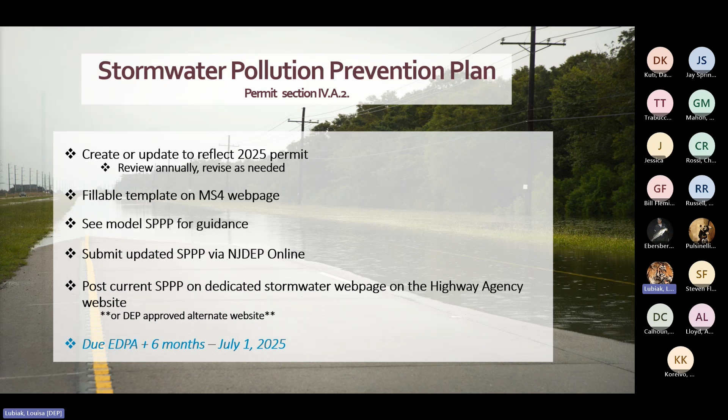This is something all permittees have been required to do from the beginning of the MS4 program. It's simple: to comply with state and local laws regarding public notice, there are certain permit-related actions that must be announced in a way that lets your community know when important stormwater decisions are being made.

Public notices are typically done by posted newspapers, social media, and permittee websites. You may also choose to send a direct email to distribute information.

Currently, this requirement is to make sure that key stormwater materials were posted somewhere on your website. The modification in the new permit will be that these materials now need to be posted on a dedicated stormwater webpage where the public can find all stormwater materials in one place.

If your facility does not have its own website, contact your MS4 case manager to determine an alternate website to post your materials. We have prepared an easy-to-fill template for your webpage administrator to use, and we have staff in-house to provide one-on-one assistance for anyone that needs help.

You will need to post your updated stormwater pollution prevention plan, regulatory mechanisms, stormwater infrastructure map, and information related to the watershed improvement plan, such as meeting dates and reports. We will talk about this topic more as we go on today.

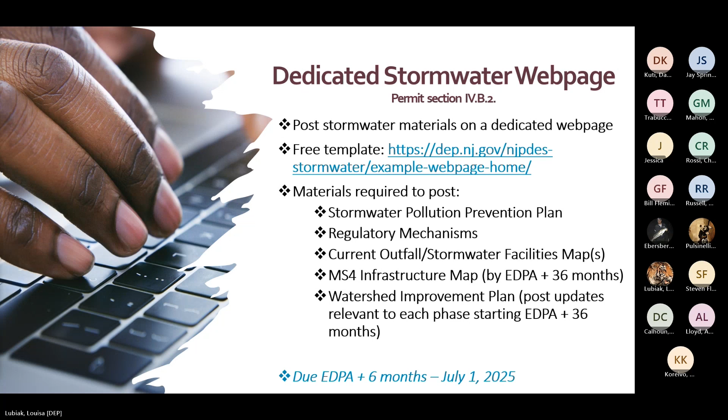This permit condition has been modified from the 2020 permit. Previously, only permittees who operate rest or service areas were required to implement a local public education and outreach program and earn a total of at least 5 points each year. The proposed change to this condition will now require all permittees to accumulate a minimum of 7 points each year by completing at least 3 different activities.

Additionally, one activity must educate businesses and the general public on the hazards of illicit connections and improper disposal of waste. The point system for education and outreach is found in Permit Attachment A and lists various activities, some carried over from the previous permit and some new, with a brief description and their associated point values.

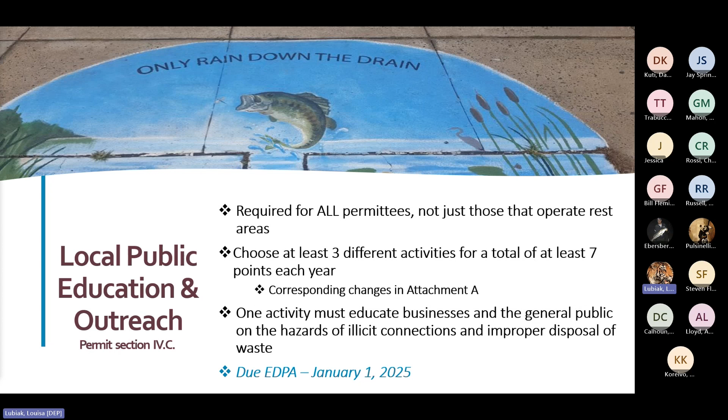You will need to keep records of your activities and report them into your annual report like always. If you need ideas or materials, we have some outreach materials on the MS4 webpage for guidance.

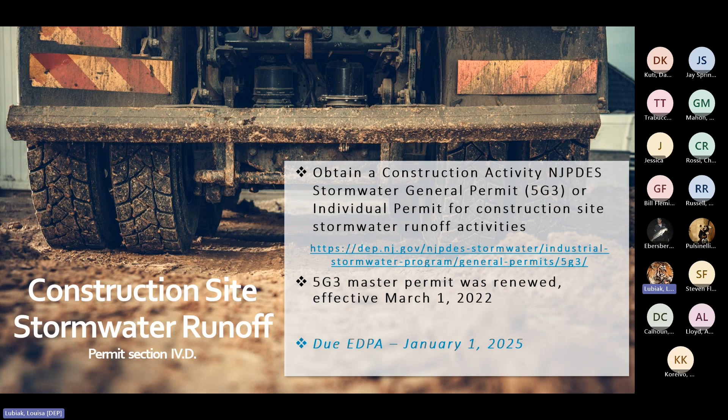This condition is a carryover from previous permit iterations. It's the requirement to get a 5G3 or an individual industrial stormwater permit before starting construction activities that disturb more than 1 acre of land, or are part of a common plan of development that disturbs more than 1 acre of land. The 5G3 Master General Permit was renewed in 2022 with some minor changes, and it's available through the link on the slide.

Here are some highlights of the changes to Attachment A, the point system for public education and outreach activities. First, we removed the option to get points for having a stormwater website, as this is now a permit requirement. All other previous activities had been carried over and modified for clarity.

We also added a series of new activities for points, such as promotional item giveaway, designated pet relief areas, regulatory mechanism signage, regulatory mechanism education, storm drain labeling campaign, a litter cleanup campaign, road access road salt pile program, and a road salt education campaign. You can find a description of each activity as well as their associated point values in Attachment A in the pre-draft document.

This condition is another one that permittees have been required to follow, as it highlights the requirements related to stormwater management designs for major development projects. Engineers who review and approve major development projects must ensure the project design complies with the stormwater management rules at NJAC 7:8 and the department's BMP manual, and then constructed according to the approved plans.

The engineers who review and approve these projects should be different from the engineers who design the projects. If the stormwater program coordinator for the highway agency is not the engineer, the SPC needs to be familiar with the condition and make sure the engineer is following the requirements.

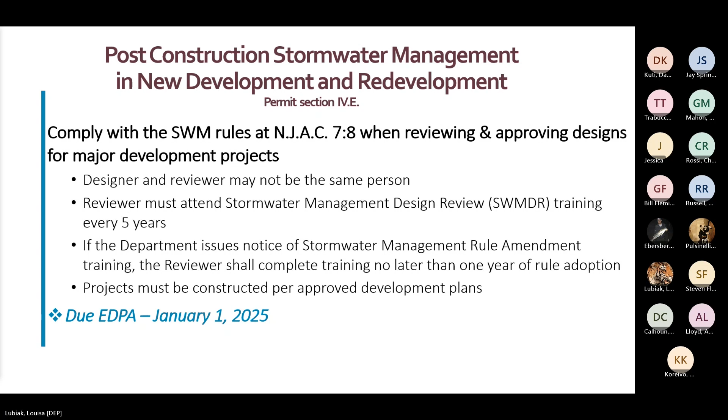In this permit, we included proposed stormwater management rule amendments from the New Jersey Protecting Against Climate Threats, or NJPACT, initiative. These rule amendments are to be adopted and become effective by fall 2025, after the highway agency permit goes into effect. Thus, the changes are being proactively added to the permit.

Requirements added to the proposed NJPACT amendments to the stormwater management rules include the addition of requirements from 7:8-1.6D, which specify which iteration of the stormwater management rules are applicable to a major development for any public roadway project that has determined a preferred alternative or reached an equivalent milestone.

Updating this permit's requirements to match 7:8-5.10, which allows the department to grant a variance from the design and performance standards of 7:8-5.3 through 5.6, assuming the conditions at 7:8-5.10 are met, and to demonstrate compliance with the groundwater recharge, stormwater runoff quantity, and stormwater runoff quality requirements of the rule.

Submit a certification stating that an analysis was conducted in conformance with NJAC 7:8-5.3J.

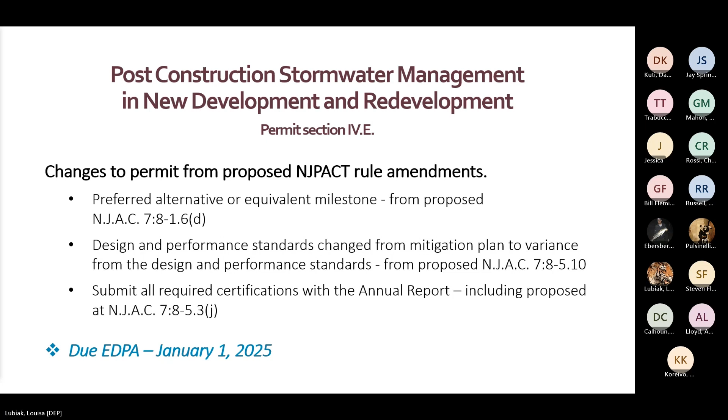The purpose of having regulatory mechanisms in place is to keep pollutants out of the stormwater and prevent them from making their way into streams, lakes, and other water bodies, where they can contribute to harmful algae blooms, or HABs, cause beach closings, and add to other negative impacts. Regulatory mechanisms help keep the community clean by setting a standard for the public and ensure you have a way to penalize those who violate those standards.

Let's go through each one briefly. One is pet waste. The intent is to get people to clean up after their pets, so their waste stays out of the stormwater system and ultimately out of the watershed. The highway agencies can also use this ordinance to completely prohibit pets from being allowed on highway agency property.

Two is wildlife feeding. The intent is to stop people from feeding wildlife like ducks and geese, for example, to discourage them from gathering where they can leave droppings on public property that also pollute the watershed.

Three is litter control. The intent is to keep trash, including solids, floatables, and residual pollutants, from contaminating stormwater and causing flooding due to debris clogging the MS4. You can either enforce your own regulatory mechanism here or enforce the state litter statute to meet this requirement.

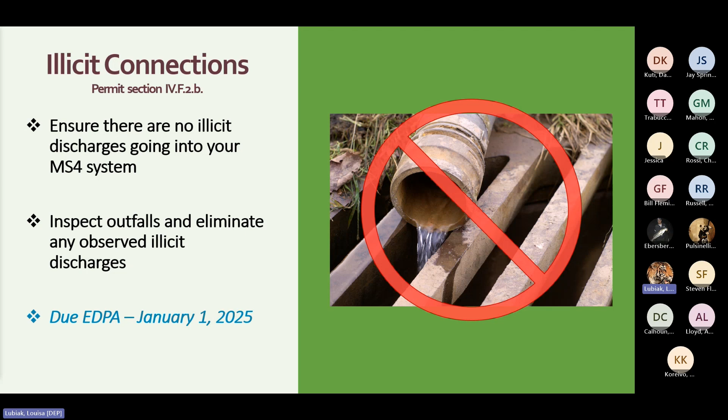This condition was carried over from a previous permit iteration. You must develop a litter pickup program that includes roadside cleanup of trash and debris and regular collection of refuse from litter and recycling receptacles, including those located at rest areas, and maintain records of roadside cleanups and estimates of the total amount of trash and debris collected.

There is no change to this condition from previous permit iterations. The permit requires quarterly street sweeping, where the permittee shall sweep at a minimum of once every 3 months, or more frequently as necessary to eliminate recurring problems, for all segments of limited access highways, including ramps and parking areas that are owned or operated by the permittee and have storm drain inlets or discharge directly to surface water.

Triannual street sweeping: the permittee shall sweep at a minimum of once every 4 months, or more frequently as necessary to eliminate recurring problems, for all segments of streets, ramps, and parking areas that are owned or operated by the permittee and have storm drain inlets or discharge directly to surface water, but are not limited access highways.

An annual street sweeping, where the permittee shall sweep at a minimum of once per year, or more frequently as necessary to eliminate recurring problems, for all segments of streets, ramps, and parking areas that are owned or operated by the permittee, but do not have storm drain inlets or discharge directly to surface water.

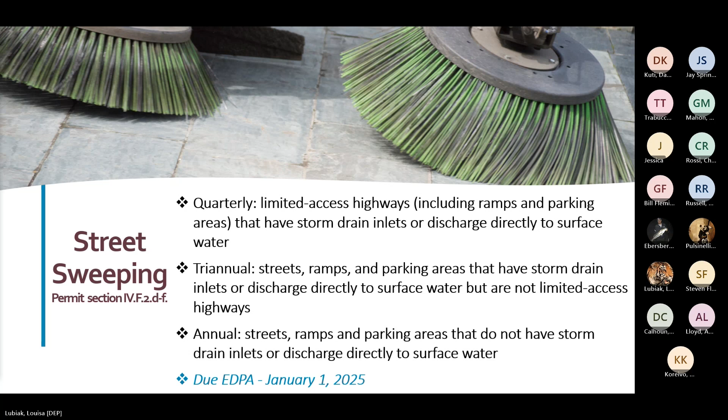Storm drain inlet labeling is another requirement carried over from previous iterations of the permit. Each inlet needs appropriate labeling to indicate that it drains to a water body. If the inlet doesn't have permanent wording cast into the structure, like the photo on the bottom shows, please attach

a button like the one above to the inlet, or use a stencil to paint a similar message. Something new in the 2025 permit is that all storm drain inlets on your property must be retrofitted by the end of this permit cycle, December 1, 2029. You do not need to replace every inlet. It is perfectly acceptable to use a bolt-on plate across the curb opening of the structure to bring old-style structures into compliance, like you see in the top right picture.

Keep in mind that if you are installing a new storm drain, you must use an inlet structure that complies with the NJDOT design standard and grate spacing in Attachment B from the permit. Another new condition is for all new storm drain installations to include a catch basin or other BMP designed for solid collection directly below the inlet or downstream of the new storm drain inlet prior to discharge to surface water. Storm drains installed on bridges and culverts are exempt from this requirement.

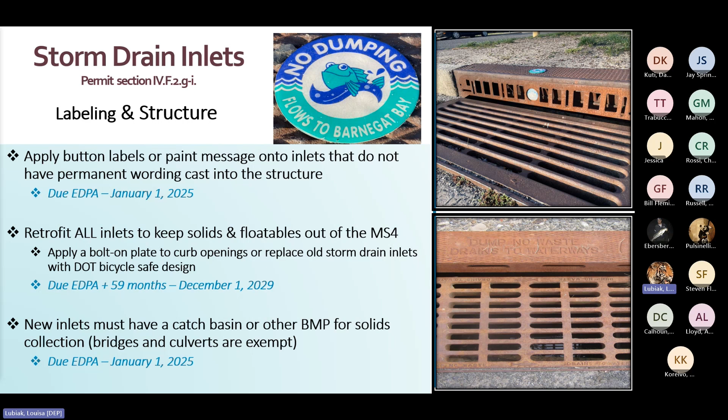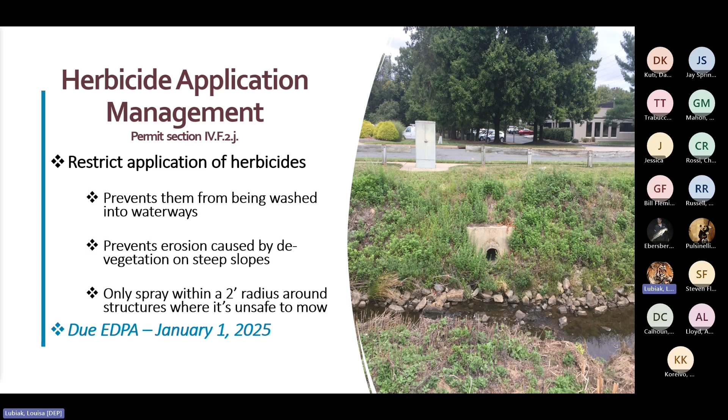This permit condition was carried over from previous permit iterations. The Stormwater Program Coordinator must ensure that staff properly apply herbicides. This means not applying herbicides on or adjacent to storm drain inlets or on steep slopes. Herbicides must only be applied in areas where it's unsafe to mow near a structure, and only sprayed within a 2-foot radius around the structure. Also, only apply herbicides along curb lines, highway medians, and unobstructed shoulders that contain unwanted vegetation, to keep herbicides from being washed into waterways and to minimize erosion and destabilization of steep banks.

This permit condition was carried over from the previous permit iterations with a slight name change. Road salt contributes to increased salinity in freshwater bodies, causing degradation of the habitat necessary to support aquatic life, such as trout. This requirement is aimed at cleaning up leftover salt piles that are sometimes deposited when the driver starts up or stops the spreader. Salt piles must be cleaned up within 72 hours of the storm, as conditions allow.

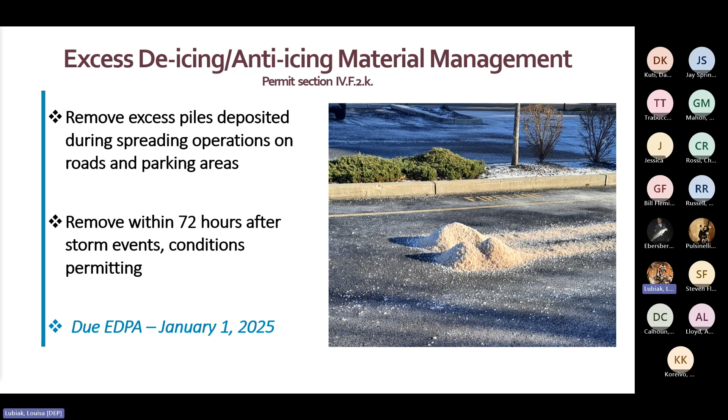This condition was also carried over from previous permit iterations with a slight name change. Grass, leaves, and tree trimmings that find their way into the MS4 have a potential to clog the conveyance and increase nutrients and total suspended solids, or TSS levels, in the receiving waters, which may result in harmful algae blooms. This requirement is intended to ensure appropriate management of materials generated by your staff when mowing, trimming trees, and wood chipping on highway agency properties. Permittees must ensure that nobody is intentionally blowing grass or leaves into the street, down the storm drain, or into ditches.

This is a new condition aimed at controlling the unnecessary removal of trees on highway agency properties, to prevent erosion and to promote stormwater infiltration. These requirements were made consistent with the No Net Loss Compensatory Reforestation Act.

First, let's talk about the exemptions, since there are so many. If a tree is a hazard, you may remove it. It is fine to remove hazard trees without replacing them. These include any trees that are diseased, infested by insects, dead, or dying. Also, go ahead and remove trees that obstruct traffic signs, pedestrian walkways, or safe passage of vehicles. If you have a concern about the condition of a tree, or an arborist declares that it is a threat, those are fine to remove.

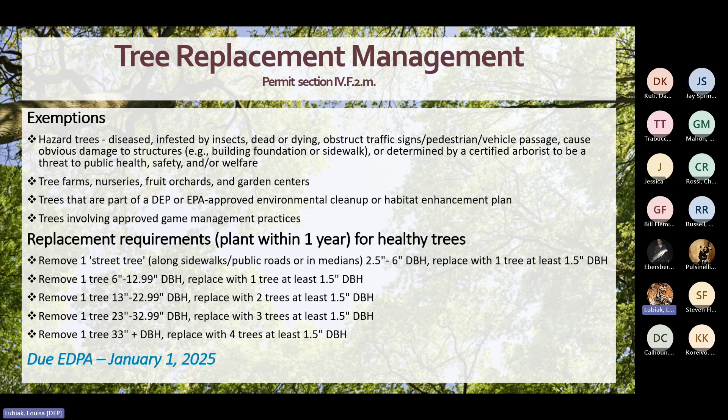The only time this permit condition comes into play is when you're removing perfectly healthy trees from highway agency property. These details are in the permit. Depending on the size of the healthy trees that are removed, you will replace it with one or more trees. It's a little stricter for street trees, which are those trees planted along the sidewalk, in a median, or along a public roadway. Removed trees are required to be replaced within 1 year of removal.

This is a new permit condition. Roadside erosion can cause sedimentation of receiving waters and stormwater infrastructure and can pose a public safety concern. We have received complaints about ongoing roadside erosion in several areas. In fact, the picture on the slide is not a stock photo, it is from one of our enforcement officers who is investigating an erosion complaint. This is a good example of why we have this condition in the permit.

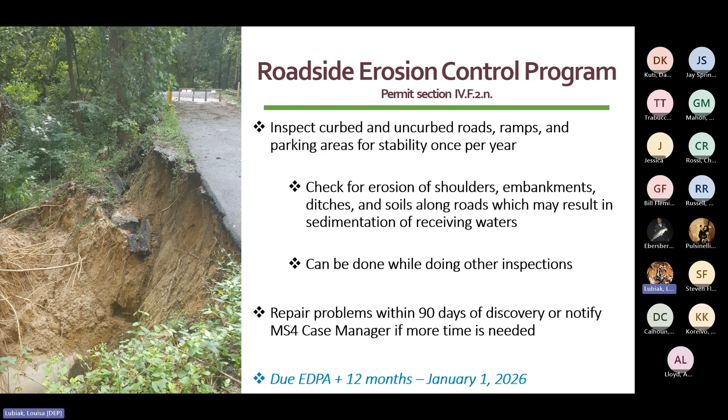Erosion checks can be done while performing other stormwater inspections. If problems are identified, the department allows 3 months to address it, unless another time frame is authorized.

This permit condition was carried over from previous permit iterations. The permittee must ensure that refuse containers and dumpsters that are outdoors or exposed to stormwater are managed as follows: they must always be covered with a tarp, lid, or permanent structure to prevent contact of waste materials with stormwater, unless actively being filled or emptied.

They must be leak-proof to prevent the discharge of leachate from the contents of the container. Temporary demolition containers, for example rubble, construction waste, and wood waste, or containers that hold large bulky items such as furniture, do not need to be leak-proof as long as they do not contain putrescible waste. Litter receptacles and refuse containers at industrial facilities authorized to discharge stormwater under a valid NJPDES permit do not fall under this permit condition.

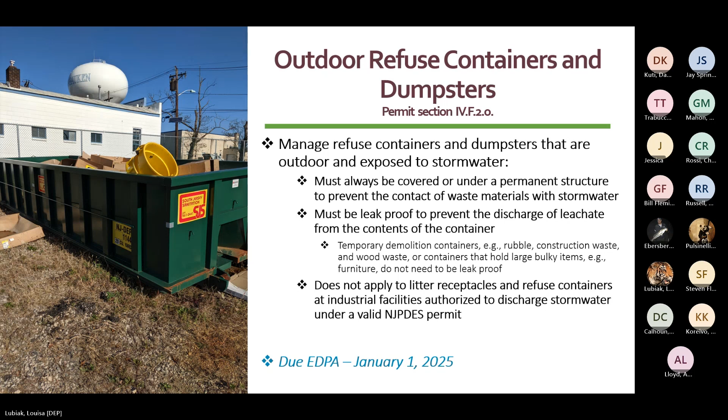This condition has been modified for clarity from the last permit iteration. Each of your outfalls must be inspected at least once every 5 years, with a minimum of 20% of the total number of outfalls inspected each year. Inspect newly identified outfalls within 30 days of discovery.

For condition, visually inspect outfalls for overall condition, structural integrity, proper function, damaged or missing components, and accumulation of trash and debris. Document when cleaning, maintenance, and repairs are necessary. Remove trash and debris within 30 days of discovery. All reports of compromised structural integrity must be investigated within 30 days, and repairs completed within 12 months of discovery.

Unless a longer schedule is approved by the department. Submit the outfall inspection form with the annual report. For stream scouring, visually inspect for erosion around the outfall and undermining of the outfall. Document when repairs and stabilization are needed.

All reports of stream scouring must be investigated within 30 days, and confirmed cases need to be remediated within 12 months of discovery unless a longer schedule is approved by the department. Submit the stream scouring investigation form with the annual report.

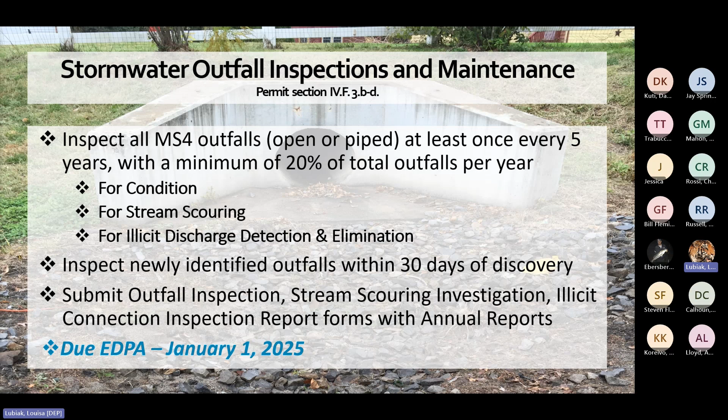This condition has been modified for clarity from the last permit iteration. Storm drain inlets: the storm drain inlet is the top grate and vertical curbside opening that are visible on the surface.

Inspect all storm drain inlets once per year. Storm drain inlet inspections can be done with a simple drive-by visual check, with cleaning and removal of sediment, trash, and other debris from the surface where needed.

Catch basins: the catch basin is the sump chamber below the surface, typically under the storm drain inlet. The inspection frequency for catch basins varies depending on how many you have. If there are less than 2,500 catch basins, they must all be inspected once per year.

If there are more than 2,500 catch basins, inspect a minimum of 20% of the total, or 2,500 per year, whichever is greater, on a rotation so that all catch basins are inspected at least once every 5 years at approximately the same frequency. Catch basin inspections must be done by looking inside the grate and hood of the inlet to see if cleaning is needed and to determine what equipment and staff will be needed to remove any sediment, trash, and other debris from the catch basin.

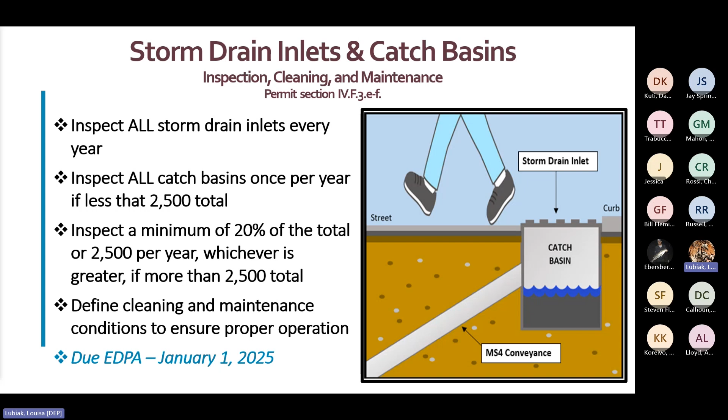MS4 conveyance inspection and cleaning. This is a newly defined condition aimed at conveyance systems such as pipes, man-made ditches, swales, etc. These must be inspected regularly and cleaned and maintained as needed to ensure proper function. Permittees must establish what conditions warrant cleaning and maintenance, as well as create an inspection schedule tailored to your system and resources. Though we didn't specifically list conveyance features, it has always been required to maintain all the stormwater facilities you own or operate, so you may already have a log of your conveyance systems.

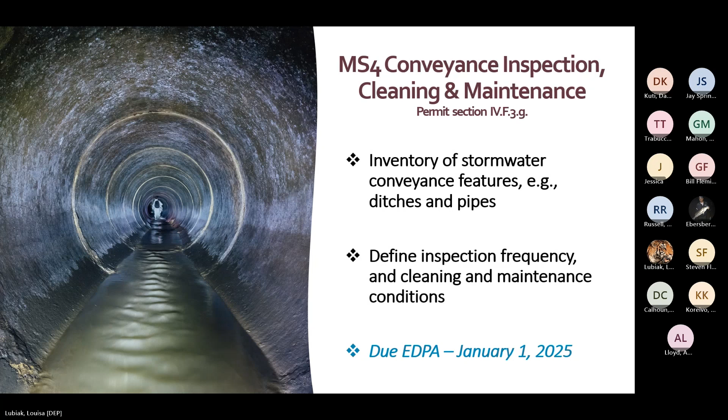This is a new condition that serves as a sort of catch-all since it refers to whatever stormwater facilities you have that are not covered in any other permit condition. The permit includes specific requirements for storm drain inlets, catch basins, outfalls, and conveyance systems, which make up most of the stormwater infrastructure. This requirement is to cover any components that are not listed, such as stormwater management basins and manufactured treatment devices. Your program and SP3 must define the conditions that warrant cleaning and maintenance to ensure proper function.

Follow the approved maintenance plans, or if plans don't exist, you can create one by following the department's Best Management Practice Manual or other maintenance guidance. If there is no approved plan or the feature in question is not listed in the department guidance, conduct inspections at least 4 times each year and after each rainstorm exceeding 1 inch of total rainfall.

If stormwater facilities are found to not be functioning properly, maintenance and repairs need to be completed as soon as possible, but no later than 90 days from discovery. Please refer to the department's BMP manual for guidance on this maintenance. If you need help, contact your MS4 case manager, who can put you in touch with our stormwater engineering group for assistance.

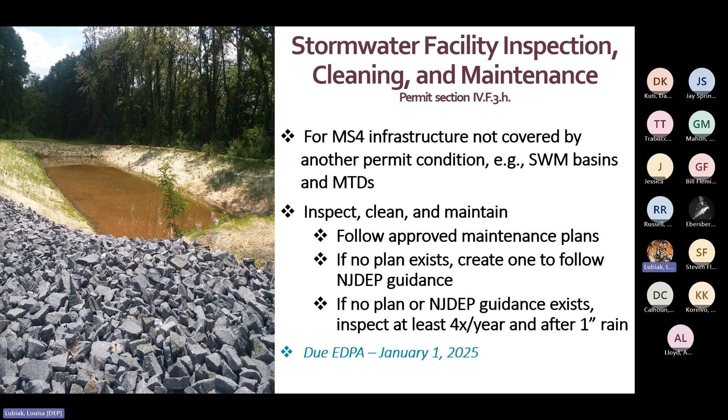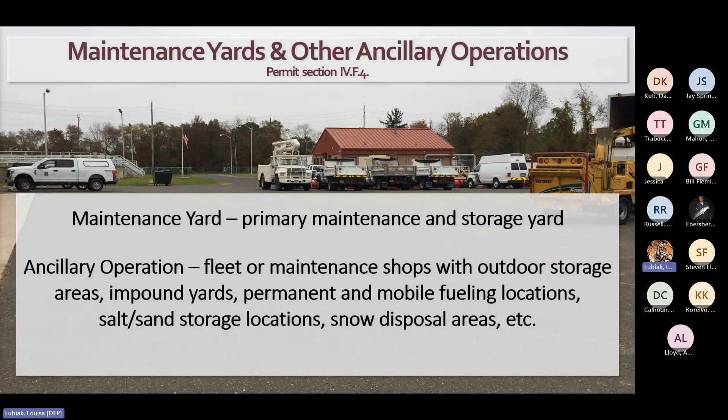The permittee is responsible for making sure that operations are being conducted in compliance with the MS4 permit at all maintenance yards and ancillary operations, and ensuring that all required BMPs are being implemented. The maintenance yard is your primary maintenance and storage yard. Ancillary operations may include fleet or maintenance shops with outdoor storage areas, impound yards, permanent and mobile fueling locations, salt and sand storage locations, snow disposal areas, recycling drop-off locations, etc.

Bulk liquids. This is a new condition to the Highway Agency permit. Maintenance yards often store bulk liquids like fuel oil and liquid de-icers in above-ground tanks. Be sure to protect these tanks by surrounding them with a secondary containment barrier, such as a spill containment dike.

Fueling operations. During bulk fueling operations, be sure to use drip pans below hose and pipe connections and block nearby storm drains. Don't delay repairs or replacement of broken fueling equipment.

Discharge from secondary containment. When you empty the stormwater from the collection area surrounding the tank, be sure to dispose of it properly. If you have determined that it's clean, you can just open the valve and let the stormwater flow out. If it appears contaminated, or if you are not sure, haul it off-site for proper disposal. If the contents inside the tank are clear, you may not be able to determine if any got mixed into the stormwater, so assume it is contaminated and haul it off-site for disposal.

Vehicle, equipment, maintenance, and repair. Perform these activities indoors whenever possible. If you must work outdoors, use portable tents and drip pans and work in areas far from storm drains or block storm drain inlets.

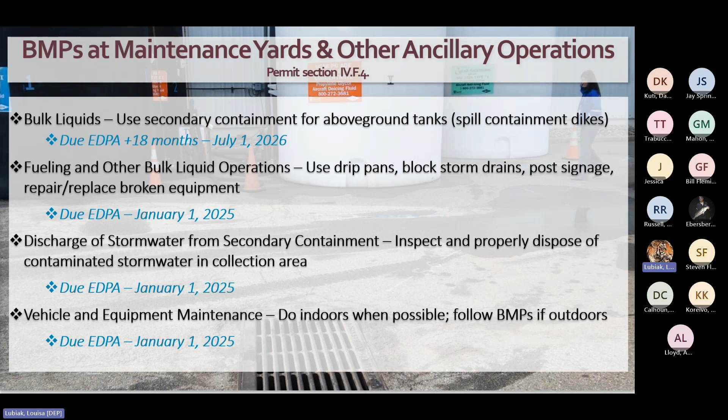Wash wastewater containment. Wash wastewater tanks need to be certified each year by a New Jersey licensed engineer. Underground tanks and pipes must be checked for leaks every 3 years, and the visible portions should be checked before every use. Check the capacity and pump out the wastewater prior to reaching 95% tank capacity, stopping use immediately if repairs are needed.

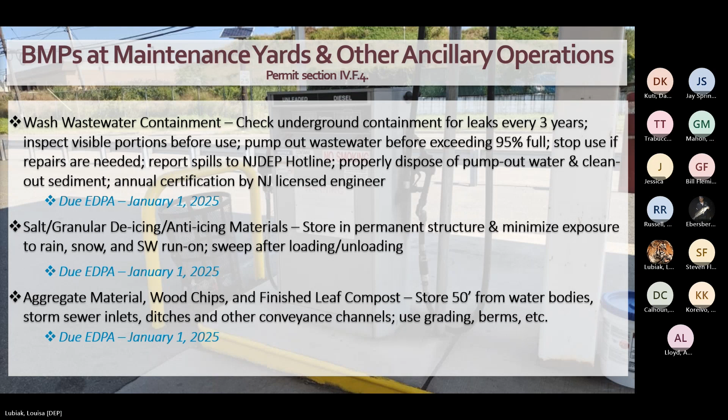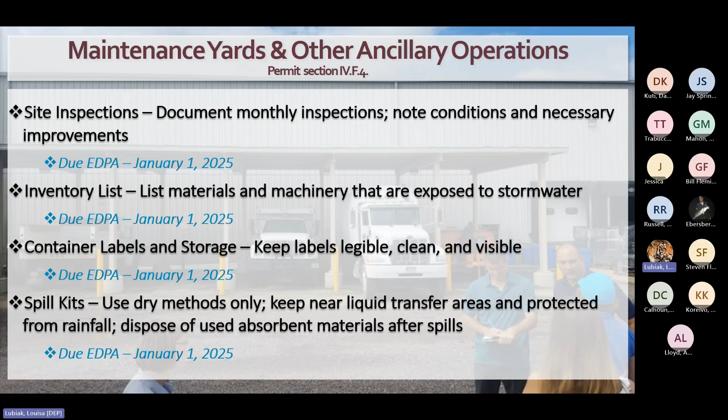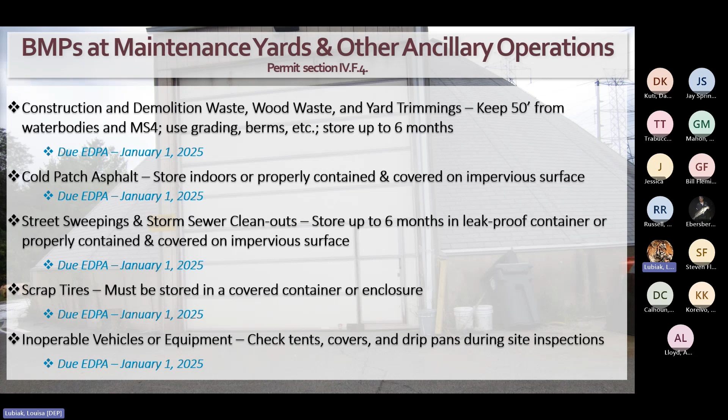Inoperable vehicles or equipment. This is a new condition to the highway agency permit. Use tents, covers, and drip pans under leaking vehicles and check them during monthly site inspections.

As we briefly mentioned in a previous slide, storage of any finished leaf compost is still covered under the Highway Agency permit. However, all composting, chipping, grinding, screening, or size-reducing activities, even if it is just once a year, are not covered under this permit and will require a separate industrial stormwater permit.

We have issued a new wood waste recycling and leaf composting general permit, effective as of January 1st. That should be adequate to cover these activities for most permittees. If you are performing any of these activities on your property, please reach out to us so that we can determine if your facility is eligible for coverage under the WRC permit or if it requires an individual industrial stormwater permit.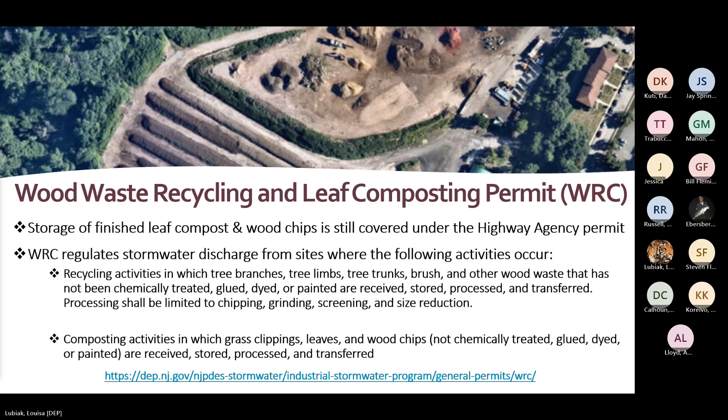The Stormwater Program Coordinator is responsible to make sure staff who support the Stormwater Program receive training at the appropriate intervals. They must also make sure the training records are kept to demonstrate compliance with the training requirements. We will go through each type of training requirements in the next few slides.

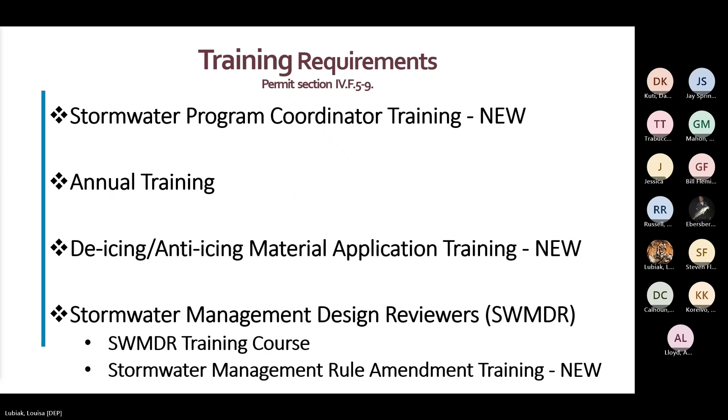This is a new permit condition. We developed this training to make sure that the permit is interpreted and implemented correctly and consistently throughout the state. All SPCs are required to attend this training once every permit cycle, about every 5 years.

During training sessions, we will be monitoring attendance and keeping records to make sure the SPC for every highway agency has been trained. If SPCs change jobs or retire, someone at the highway agency needs to let us know who the new SPC is within 30 days. The new SPC must attend the next available session, and we suggest they watch the recorded training session posted on the MS4 website to hold them over.

The SPC is responsible for conducting or coordinating annual training for their staff, including contractors, on stormwater-related job duties. New staff must receive training within 3 months of commencement of duties, then annually after that.

Not everyone needs to be trained on every topic. Just make sure the people who are doing the work related to the topic are getting the appropriate training. The only topic that applies to everyone is a review of the most current SP3. You might not have a training department, so a discussion of these topics should be conducted each year, led by the most knowledgeable person you have on that topic. This can be done in a group setting or one-on-one, in the field, in the office, or on the computer.

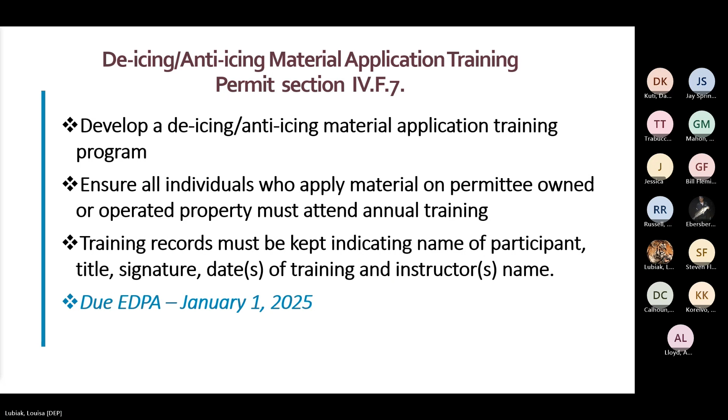The SPC must ensure that those engineers who review and approve designs for major development projects on behalf of the highway agency attend the department's stormwater management design review training, which we call SWMDR. The purpose of the training is to ensure that projects are designed in accordance with the rules, so that once a project has been constructed, there is minimal impact on stormwater quality, runoff quantity, or flooding. This is a technical course which will cover the most current stormwater management rules and the department's BMP manual. This course is approximately 12 hours in length, broken up over 4 half-days, and is required every 5 years.

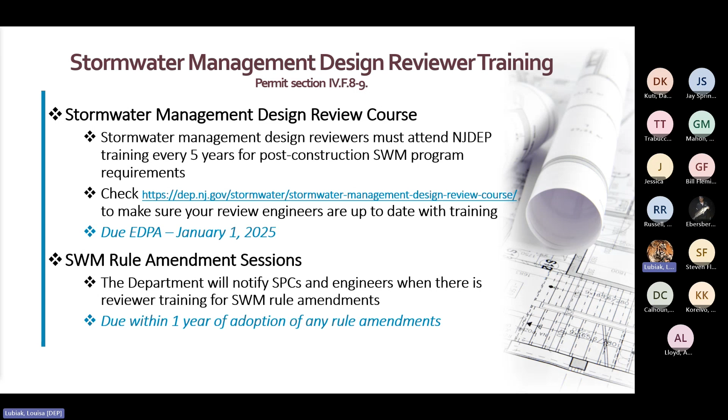Additional training may be required if there is an amendment to the stormwater management rule. Training must be done within 12 months of adoption of any amendments. Rule amendment training sessions will be announced by the department on our website and via email to all SPCs and to engineers who have attended previous SWMDR courses. If you have attended SWMDR and your email address changes, please let us know. The department has a list of past course attendees and certification dates, so you can check the status of your engineer.

If you have already been operating under the highway agency permit, you should have already mapped most of these items. Permittees must submit the MS4 infrastructure map electronically to the department by January 1, 2028. Electronically does not mean a PDF sent via email. Rather, it means submitting georeferenced shapefiles, geodatabases, or AutoCAD files.

The items highlighted in yellow are proposed new mapping requirements in the 2025 permit renewal. You may have already captured them, so would just need to enhance your map or upgrade the components of the map to indicate the location of manholes, stormwater conveyances, including the type and the direction of flow, pump stations, groundwater discharge points, for example at an infiltration basin, and the location and type of interconnections to other storm sewer systems. Items highlighted in blue are modified from the previous permit.

What happened? Okay, sorry about that.

Items highlighted in blue are modified from the previous permit: all storm drain inlets, not just those after EDPA, including the associated attributes. You already mapped stormwater management basins, subsurface infiltration detention systems, MTDs, and GI. These will be moved into the new Stormwater Management Measures feature class with the associated type attribute. The infrastructure map must be reviewed annually, or more frequently as necessary, and updated to include the location or attributes of any new or newly identified MS4 infrastructure.

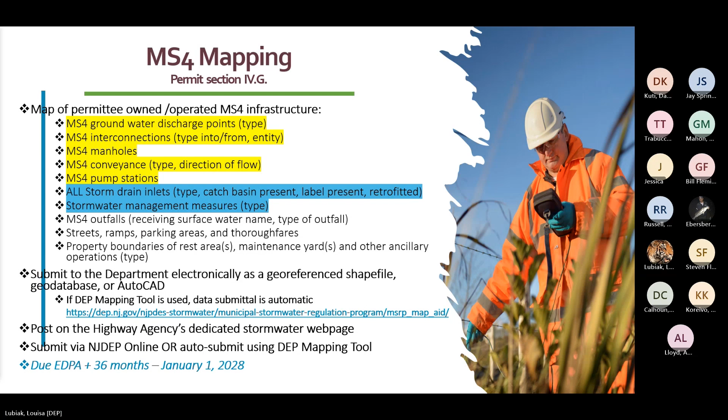There are many water quality impairments and resulting total maximum daily loads, also known as TMDLs, that affect water in every town across the state. In case you are not familiar with TMDLs, they are reports developed for streams, lakes, or other surface waters that have violations of their water quality standards. A TMDL is required to identify how to improve water quality for the specific pollutants in violation in that water body, such as phosphorus, suspended solids, or fecal coliform. Some of these violations or impairments affect fish and aquatic biota, drinking water intakes that supply the water we drink, and rivers and coastal waters where many of us swim.

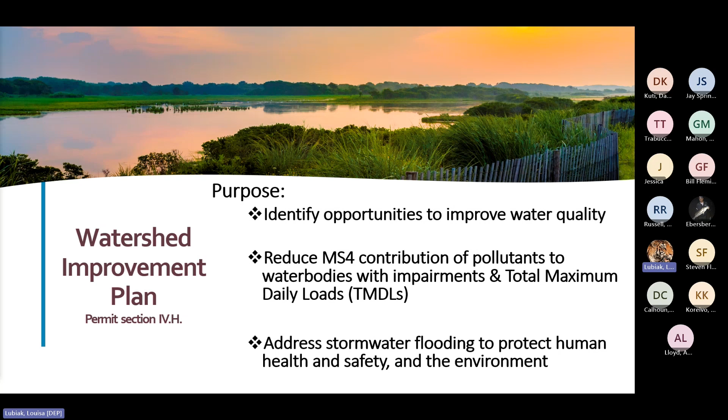Every summer, more and more lakes are found to have harmful algal blooms, aka HAB, as a result of poor water quality. Some of these waters have no other discharges into them other than stormwater runoff. The department is requiring that stormwater permittees develop watershed improvement plans, WIPs, to identify water quality and quantity problems affecting their waters and determine what improvements can be made to reduce their contribution. The highway agency permit will require permittees to communicate and collaborate with their surrounding municipalities to reduce the highway agency's resource needs and ensure a more coordinated approach is taken. The WIPs may also be developed on a regional basis among towns, managed by a watershed group, a regional authority, etc. We do recognize that some sources of pollution and flooding are beyond your jurisdiction, such as farmland, municipal, or other highway agency properties, but this exercise will help identify those sources.

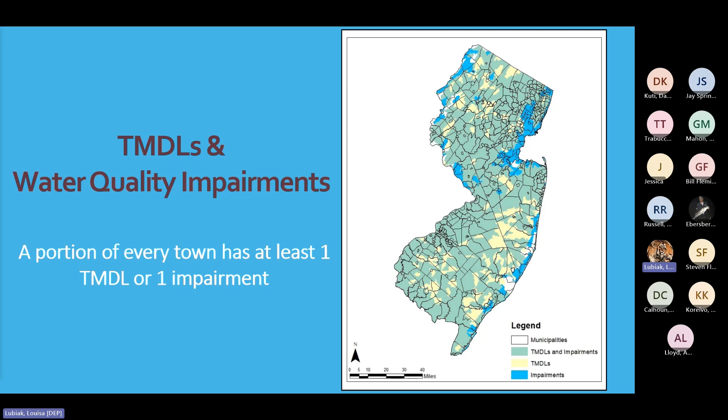Here you can see a map depicting the TMDLs and impairments and waters across New Jersey. Areas with water quality impairments for which TMDLs have been developed are represented in yellow. Areas with water quality impairments, but no TMDLs developed yet, are represented in blue. Since both these layers are transparent, the green portions of the map represent areas where both a TMDL and an impairment are present. You can see that at least a portion of every town in the state has an impairment, a TMDL, or more often than not, both.

Here is an overview of the Watershed Improvement Plan requirements. Each of these phases will be submitted via NJDEP Online. The department recognizes that development of the WIP is a significant undertaking, so we will be available for guidance throughout the process. The development of the plan is divided up into 3 phases.

Phase 1, due by January 1, 2028. The goal of this first phase is to inventory all stormwater-related information, which will then be used to inform what

is likely contributing to the water quality and quantity problems, and where improvements could be implemented, which then leads us into Phase 2. Phase 2, due by January 1, 2029. The goal of this next phase is to evaluate the information that was gathered in Phase 1 to determine what potential improvement projects can be implemented for both quality and quantity concerns.

Phase 3, due by December 1, 2029. The goal of this last phase is to select which of the potential quality and quantity improvement projects from Phase 2 you will implement and on what schedule.

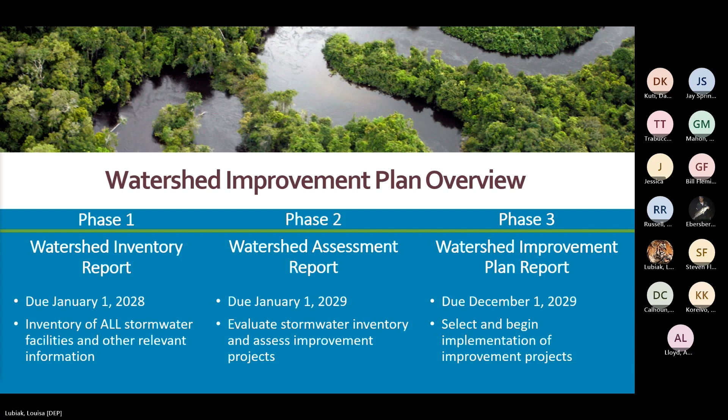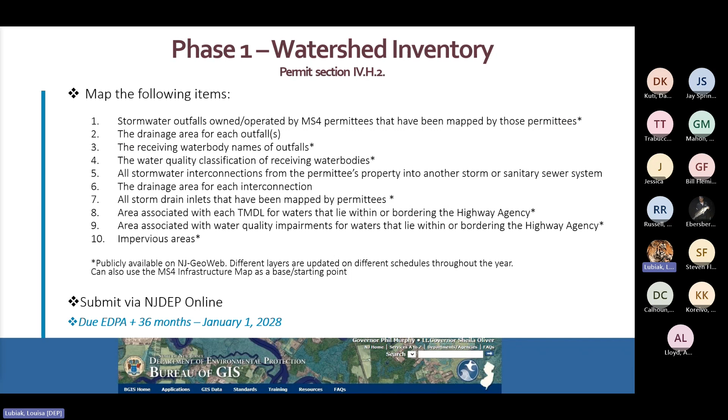You should combine your data with the department's data to create a complete picture of the discharges to segments of streams with specific impairments and TMDLs. It will be important for those preparing this phase of the plan to be familiar with the topography of the highway agency properties.

As part of the department's effort to continually provide guidance and resources to assist permittees with permit compliance, we have created an interactive web-based tool called NJ-WET, short for the New Jersey Watershed Evaluation Tool. This web-based tool was created with a wide variety of users in mind and will ultimately assist our permittees in the creation and implementation of their watershed improvement plans.

The department has always had stormwater-related data available like TMDLs, surface water quality classifications, and HUC 14s. However, before this tool, users would need to download the entire dataset and filter through for their specific details. We wanted to find a simpler way for our permittees to view and download permittee-specific data related to their surface water quality. The tool is broken up into 4 tabs.

The Home tab features an interactive dashboard with every data set available from the department related to stormwater. The next 3 tabs will feature a grouping of stormwater-related data that includes TMDLs and impairments, MS4 infrastructure, and impervious surfaces, all of which are required as part of the WIP Phase 1 mapping inventory.

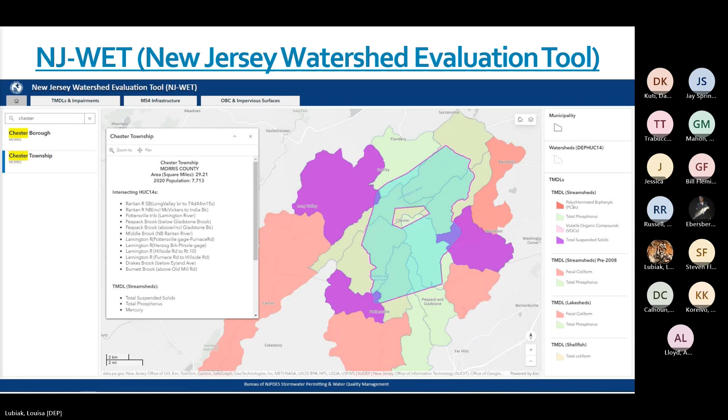The Watershed Assessment Report, which is Phase 2, is due by January 1, 2029, which is 1 year after the watershed inventory deadline. The permittee shall conduct an initial Phase 2 public information session at the start of the Watershed Assessment Report phase. This report will be created by using the mapping from Phase 1 to create an assessment of

potential water quality and quantity improvement BMPs to be implemented at all permittee-owned or operated maintenance yards, ancillary operations, and rest areas by subwatershed and parameter.

The report will also need to include an estimate of the reduction of pollutants, a summary of feedback from public sessions, an estimate of funding needs, a tentative implementation schedule, and a plan to implement new BMPs for future projects regarding any linear projects such as roadways and ramps.

Hosting stakeholder sessions is an important and required step since these projects may involve tax dollars, disruption of roads, or use of public property, and many of the interested groups may have observational stormwater information.

The permittee shall post the watershed assessment report on its dedicated stormwater webpage and announce a 60-day public comment period, as well as submit the watershed assessment report to the department via the NJDEP online stormwater document submittal service by EDPA plus 48 months. The permittee shall conduct a final Phase 2 public information session no more than 45 days

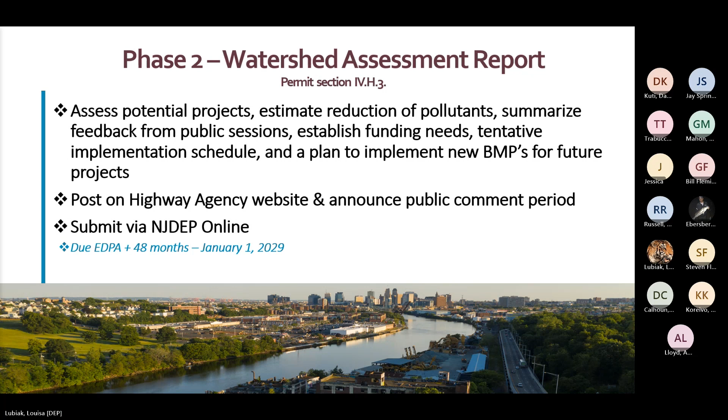The final phase, the Watershed Improvement Plan report, is due by December 1, 2029. This report shall include a summary of proposed project locations, comments received from public information sessions, annual cost analysis for each project, coordination with other regulatory programs, final implementation schedule, schedule of public information sessions, and anticipated challenges beyond the jurisdiction of the permittee. The Watershed Improvement Plan shall be updated when necessary based on the biennial review of revisions to the impairments of the permittee's water bodies based on the department's integrated report and newly adopted TMDLs.

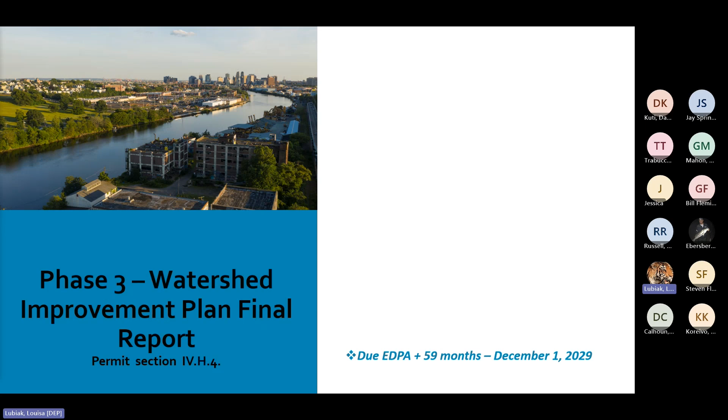The department recognizes that there will be broad differences in the scope of work that different highway agencies will have to do for their WIPs, given the variety of properties. We will work with each permittee to help identify what can be done and will provide a WIP report template for you to follow.

The department will notify you if there are additional permit requirements that you need to adopt. This does not happen often. Such cases would result in minor modifications to this master general permit and would require the permittee to meet either numeric effluent limitations or implement new or enhanced best management practices.

For optional measures, you are allowed to adopt and enforce other measures to your stormwater program that exceed the requirements in the permit. Or you may have a problem that is unique to your area that relates to stormwater that you want to address.

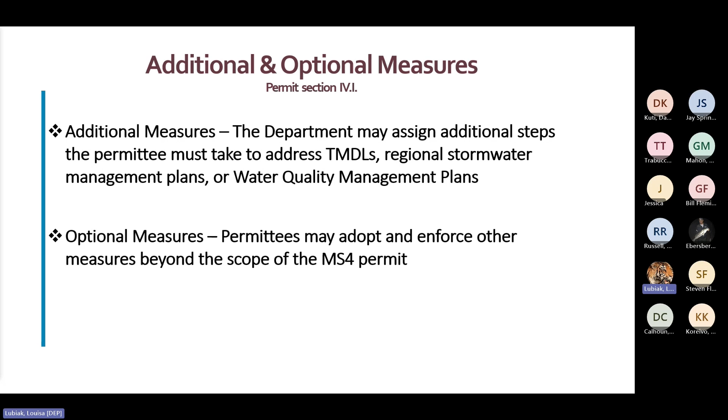When DEP or EPA staff audit your highway agency complex or conduct a site inspection, they will be looking at your records to demonstrate compliance with each permit condition. The permittee must ensure that these records are ready upon request. Be sure to keep copies of records or logs, inspections, repairs, and investigations related to permit compliance for at least 5 years.

Every year between January 1st and May 1st, report on the previous calendar year by accessing DEP Online to submit the annual report. You must attach copies of your outfall inspection forms, stream scouring investigation record-keeping forms, and illicit connection inspection report forms, if applicable. If this is your first time submitting an annual report and would like to see previous year's submissions, just contact your MS4 county case manager and they will provide whatever reports you need.

Several conditions that were once included in permit attachments have now been added to the body of the permit, leaving only 2 remaining attachments in the renewal permit. Those were the former Attachment A, Measurable Goals and Implementation Schedule, and the former Attachment E, BMPs for maintenance yards and other ancillary operations. Former Attachment D, the Major Development Stormwater Summary, will now be posted on our webpage and permittees will be required to attach it to their annual report.

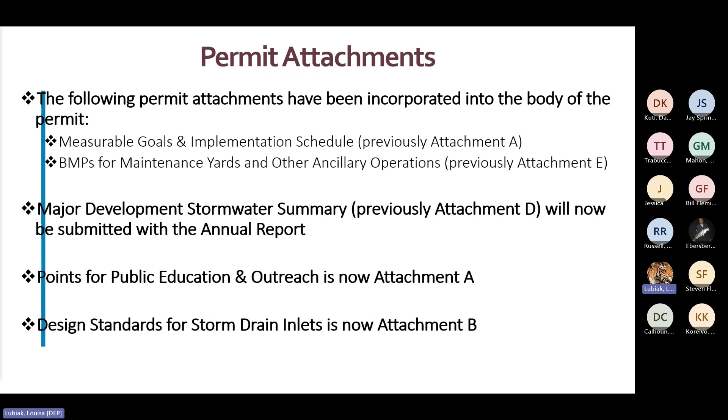Attachment A is now the list of activities to choose from to satisfy the public education and outreach condition each year. As we mentioned earlier in the presentation, we consolidated the choices, and instead of 4 categories, we now have 3, and we simplified the point system so each activity is worth 3 points. We have removed the possibility of earning points for having a dedicated stormwater webpage, since that is now a permit requirement. Attachment B is now the set of design standards for storm drain inlets.

These are the items that you can expect to submit to the department initially and after any updates to reflect changes to your stormwater program. Please take a moment to read over this slide.